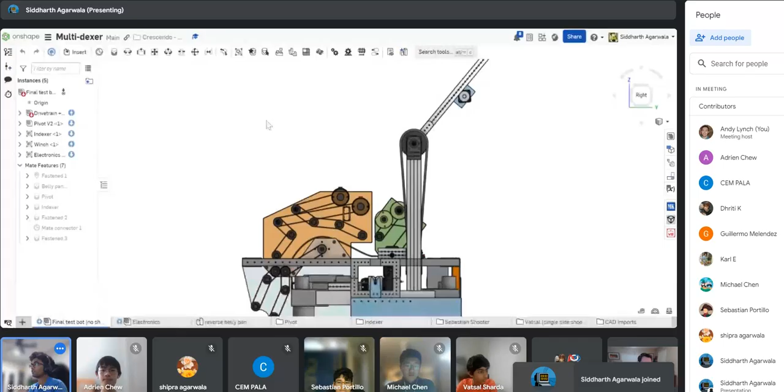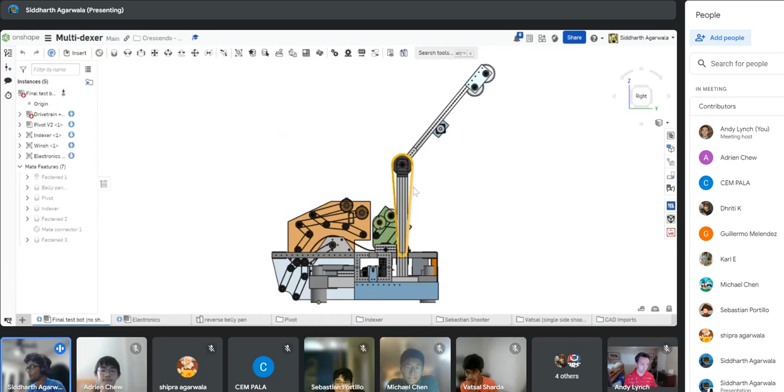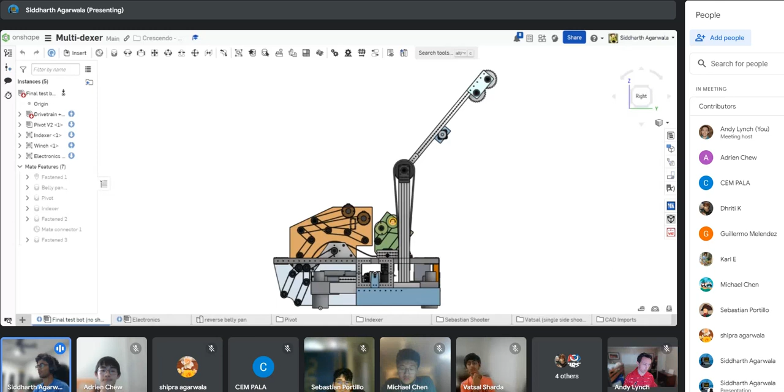So this is kind of where we started the week. We had a double indexer kind of style mechanism, similar to what the Rembrandts and Spectrum are doing, where they would have multiple paths for the note to go. However, on Saturday, while we were discussing this whole robot, we realized that packaging all of this indexer mechanism over here and then having a shooter all the way out here just creates so many more problems than it solves. We'd have to have an under bumper or underbelly pan electronics mount, and our arm had to be reconfigured, and then our shooter was also kind of just all over the place. It seemed really susceptible to jamming, so we decided to scrap this idea and move on.

I'm working on an Open Alliance post right now to share this design with everyone so they can take a look at it. But moving on to the first design we made after we decided to scrap that robot.

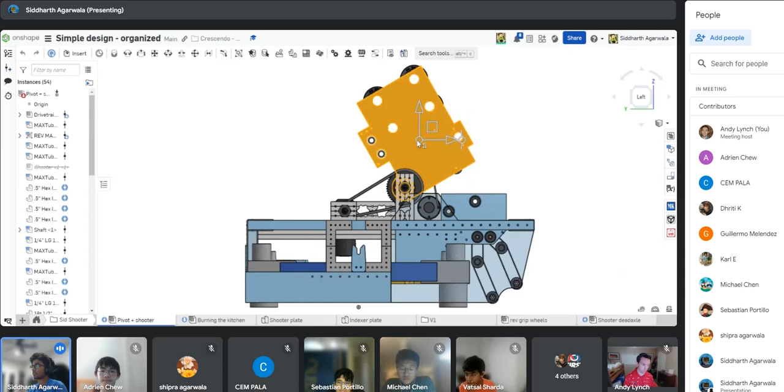We decided to move our shooter mechanism way further back. So if we hide this, the idea is that the shooter has as few direction changes from the note as possible, and the resting position is the angle to shoot into the speaker from the subwoofer. That way there's as little spots for the note to get jammed or clog up and cause us to be unreliable.

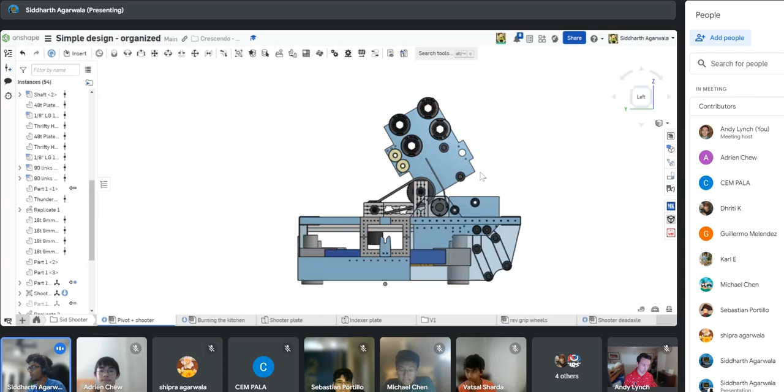And this idea was just kind of like a first draft. It wasn't really fleshed out, but the nice thing about this one is that the pivot is over here and the general roller mechanism is pretty compact.

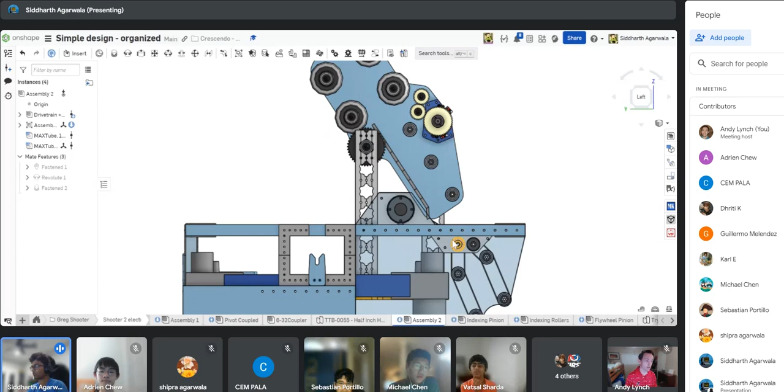And then Greg built on top of this with his design. In the previous design, there was an indexer system right here that built on top of the intake rollers, so it was powered by the same motor. What Greg did was eliminate that and make the indexing path a little bigger, so if we turn the flywheel, the note doesn't bend into an indexer and can feed straight into the flywheel.

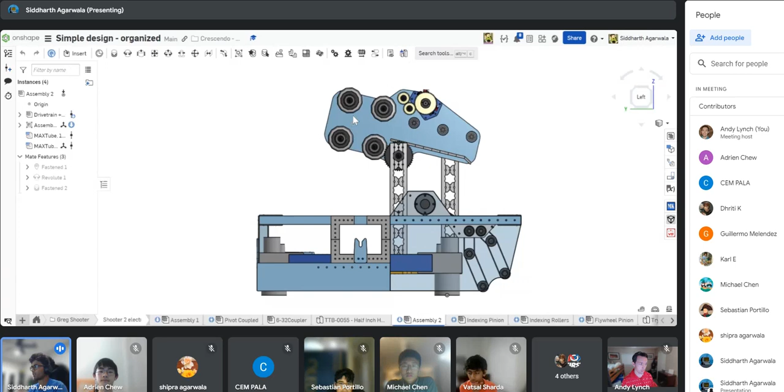I think this seems like a very well fleshed out design that we can use probably for our actual robot. And the nice thing about this new design is that we have significantly more space for all of our electronics in the belly pan, and a lot more space to do stuff and add other mechanisms.

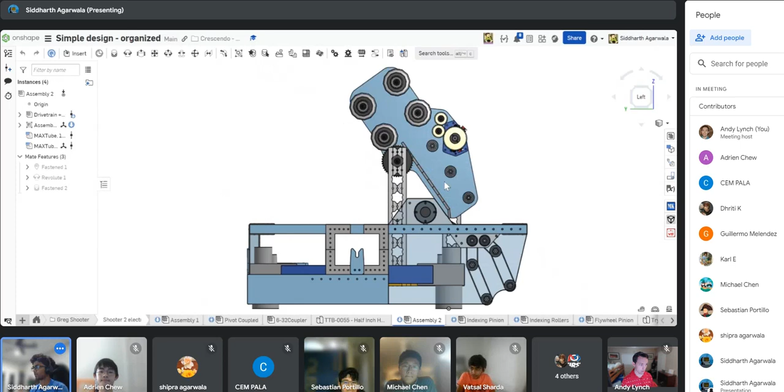I've kind of taken a break from CAD because I sank a lot of hours into the other robot designs. But I have been thinking about how we can move forward from this design, and I think maybe this week we could get some of these pivot things fleshed out and actually tested, maybe at Lamar with the practice robot, because the laser cutter works now.

And I think on top of that, what we can do is start working on a basic climber mechanism, because I know one of the debates we've been having is whether our winch climber is even worth it. And I guess we've decided that we also want to have a safe option as well as a complicated option. The initial idea that Cedric proposed was an extending telescoping tube.

However, I feel like if we're just going to do a telescoping tube, we'd be better served making an Everybot climber, just because it's so much simpler, cheaper, and easier to build and maintain.

So I guess it just becomes a question of packaging and mounting. There's a couple of different designs that we're interested in, like Spectrum's, Rembrandt's, and the Everybot climber. So that's kind of where the CAD's at right now. The arm kind of got scrapped for the time being. If we have more space after, we'll think about the trap, but right now it's kind of off the table.

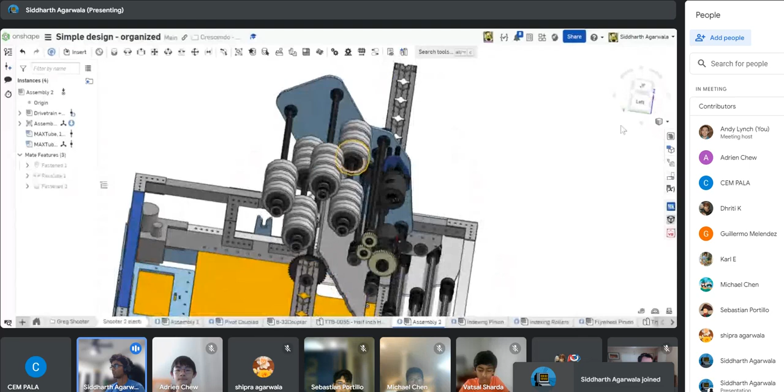So the idea is it shouldn't. We're thinking about ways to have the amp deflector part be over here so that we shoot into the amp, it bounces, and then back to that. Yeah, so in this space over here, we'd have some sort of flap that just allowed the note to slide back down into the amp. So nothing actively trying to score in the amp yet.

And if we do have space for an arm, which I'm pretty sure we will, we can probably figure something out that way. But until we get to a point where the shooter is ready to go, I think we'll just stick with shooting into the amp if need be.

Oh, all right. But that's one of the things that I think we can work on this week in terms of design, climber and arm/amp mechanisms. I think having a basic sketch just to show the amp, a line up to the speaker, and also maybe the chain height. You can quickly see, okay, here's where all the elements we're going to be interacting with are going to be, so we can get an idea.

Maybe even if we human feed, could we feed into the shooter, that kind of thing. Just having all those dimensions lined out will help us understand what this thing can do, and if there's something we're missing.

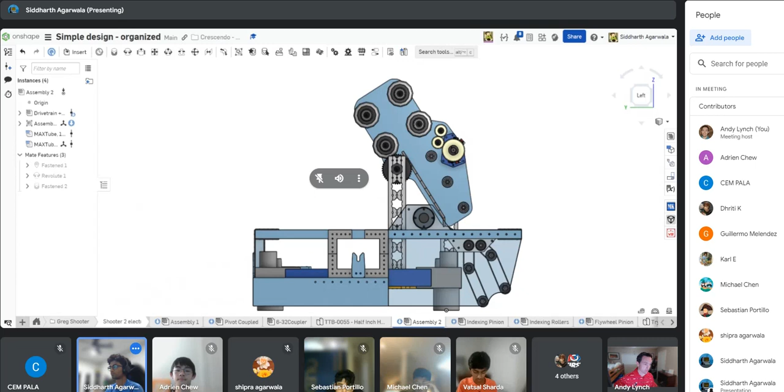Okay. Before we get too deep into the CAD, because we might decide we need to change some big dimensions here, where everything lines up. Is this right now in this position under the chain, or does it need to pivot and go under the chain?

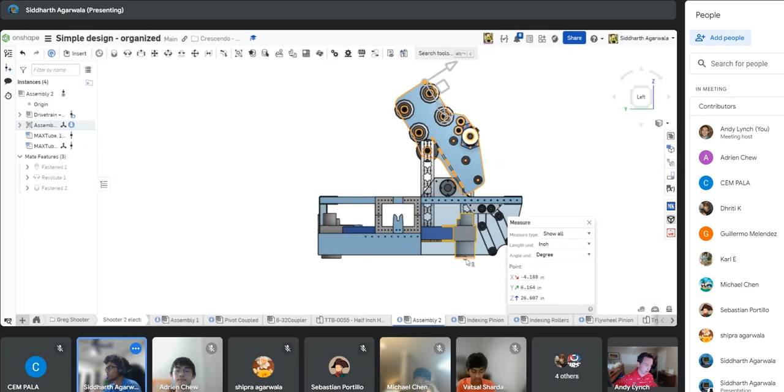Let's see. My computer's running a little slow today. Well, either way, we got to build a sketch.

And that's an interesting idea, right? If we had some sort of flat extension, do we have something from this pivot point that could reach the chain? And then if we wanted to do a winch, we pivot with this arm to enable the hook, winch up from there. So I think we do need to really think about all these different options and the climbers and all that stuff.

Yeah. But we really need to build something pretty quickly on this shooter so we can convince ourselves that it's going to do what we expect it to do.

So I think you guys need to just reach a point where, you might change a little bit, but the basic flywheels and how we're spinning the motor, one or two indexers, that's going to be about the same.

Build that, and we test shooting with it to make sure it does what we expected. And then if we need to, we'll probably make version 2 that fits a little better.

So maybe you guys hand that off. I mean, do you think you can take what you have here? I think so. Sebastian can look at it, check it, and then go through the process of laser cutting and getting things out. I think they could definitely take a look at that. Yeah, I think that's a good thing to hand off so you guys can just focus on finalizing the whole CAD.

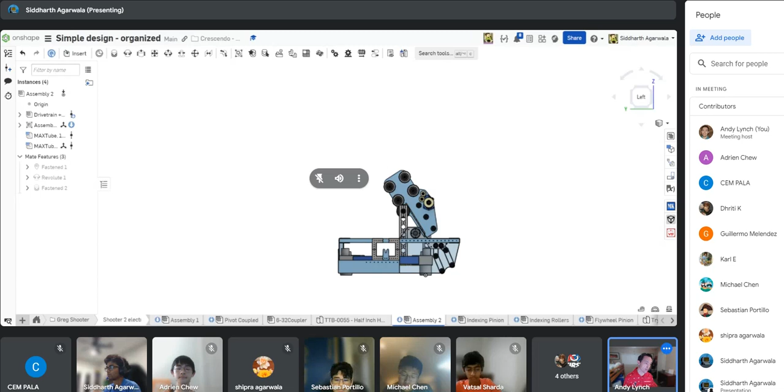We've got to get as much of the systems in place where we feel like we just can't make many huge changes anymore. We've decided things, but I think we're still up in the air on a lot of items. Yeah, we've been changing the CAD a lot recently, and that's not really conducive to us getting anything done.

Well, the good thing is the ground looked like it had a successful test. Does everyone agree, or did I not really get to see all the tests?

When we ran it off the battery, it was significantly better than the drill test, and it looked pretty good for where I was. What motor was it that we had on there?

A 775, and it was like a 10-to-1 reduction, I think. So it's actually kind of slow compared to what a lot of things are running, and it doesn't have any grip. And it picked up without any issue. Correct.

Do we think it makes sense to duplicate this and mount it, and start building this structure so it matches up with the Westside chassis so they can drive test with just an intake? I don't know if we have the materials at Westside at the moment to do that, because I don't think we brought much acrylic or dead axle roller. So how are you guys putting it?

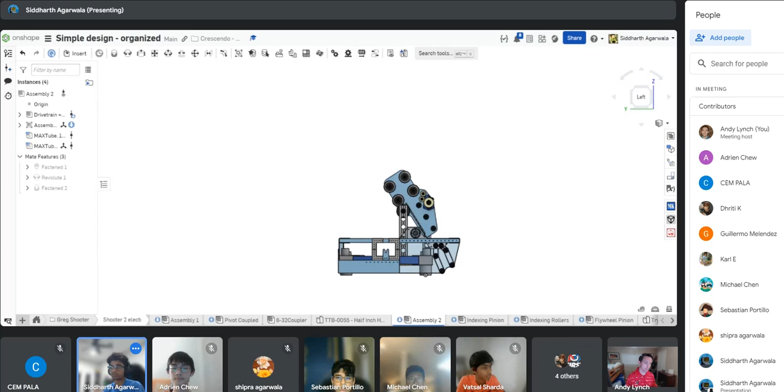Another climber that I really liked was Spectrum's climber. Let me pull up a picture real quick. Basically they're using chain to drive back, pulling their robot down diagonally, and it gets them the height pretty quickly, getting them closer to the trap to score in the trap, which I think is a pretty interesting concept.

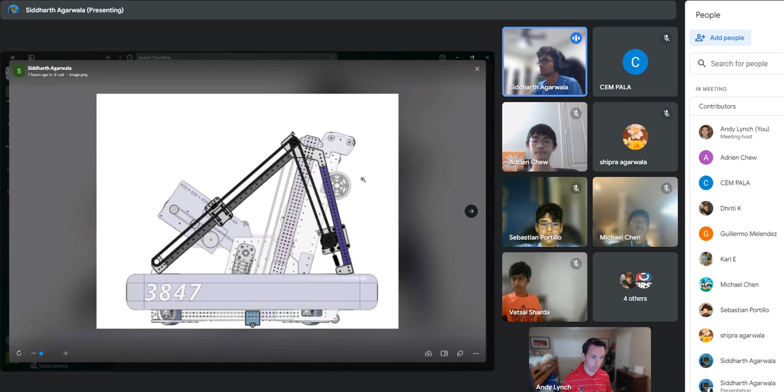Now, we can't do it to the same extent they do, because they have space across their entire robot to get down. But I think we could probably do an abbreviated, steeper angle version of this, and it would be decently successful, because it's just a linear slide bearing on a chain, fastened with one of those number 25 chain fasteners.

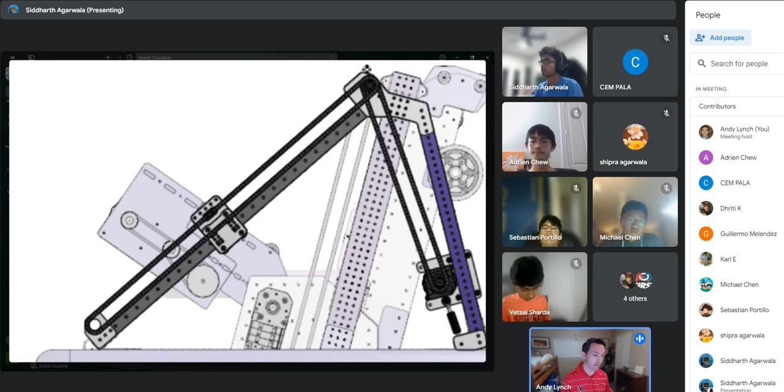Yep, I think there's a lot going on there. I don't know if we could pull it off quickly. Yeah, this would definitely be like a stretch goal. But let's just say if we don't have this planned out properly by Saturday, doing stretch things is going to be really tight.

Yeah, so let's think about where we want to be, right? Looking at going to a competition in the last two weekends of March, we really want to have the robot done by March. We can have two weeks to test. We've got spring break, we've got all that stuff.

So we're literally 3 weeks away from the end of February, maybe a week and a half or so. So by next Saturday, the 10th, we need to have a plan of what we're going to build. And if we work hard and get everything on those steps done, we might have a robot that has most of the mechanisms built out, and we have 2 weeks to test it in March.